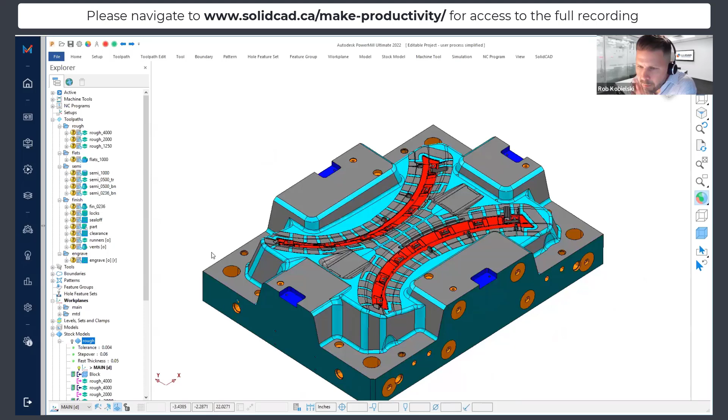And that's what I'm going to highlight right over here. I'm just going to jump into this one straight away. I've loaded up another project here. You can see, this is a block that I had up earlier, but we can consider this as an exemplar project. And what I mean by that is, let's just say I want to encapsulate these programming processes in every type of job that I bring in. I want to create a process for these toolpaths right over here.

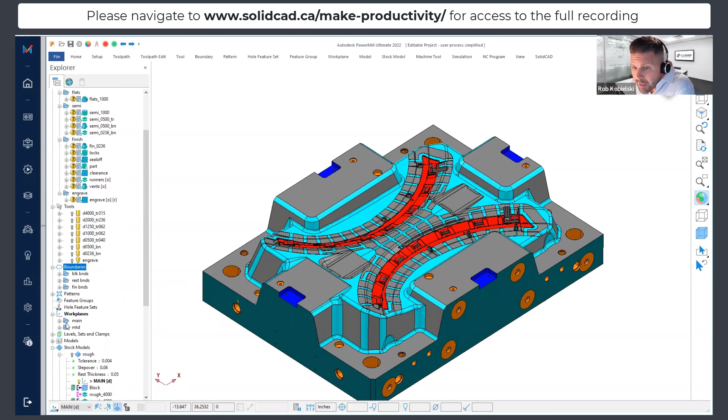What the user can do is manually make your entire project, use your naming convention, use your tools, use the kind of boundaries that you want, and most importantly, your stock management. And once you have this all set, we're going to create a process with a single mouse click to automate this again and again. Okay, so the only thing you have to do is think, well, what's the item I'm not going to be bringing in every time? And that's clearly going to be this model.

So I'm going to ditch this model right over here, and I'm going to leave every other entity in this project. And I'm going to use this tool right over here in Make Productivity called Automated Process Macro Builder. It's going to give you the option straight off the hop to say, what do you want to automate? What do you want to bring in every single time? And what I said is every project entity. That's going to include your folder organization, all those items I mentioned.

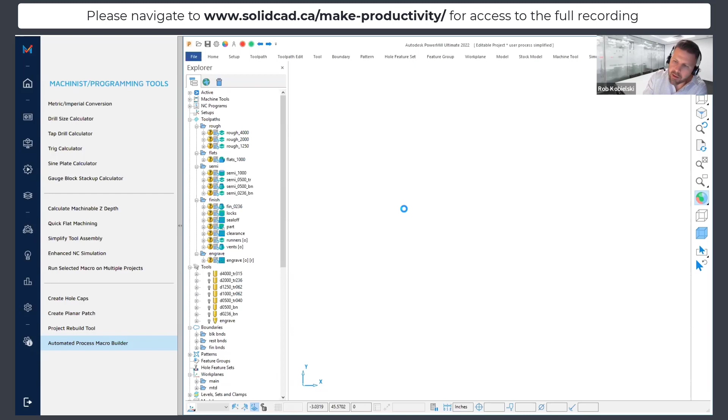So this is actually happening live right now. Single mouse click, Make Productivity is copying everything. Your favorite parameters, your step overs, your strategies, everything like this. And when it finishes up, I'll just very quickly load the code that it has made, just so we can see there's nothing up my sleeve, right?

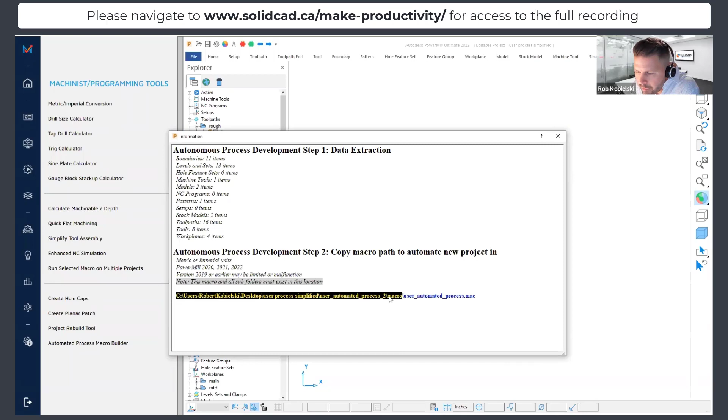So this ought to be wrapping up quite shortly. Here it is right over here. Actually, this is your final confirmation. And it's telling you, okay, all you got to do now is you have an automated process. Run this automated process against your new project. And if I crack open Notepad just real quick,

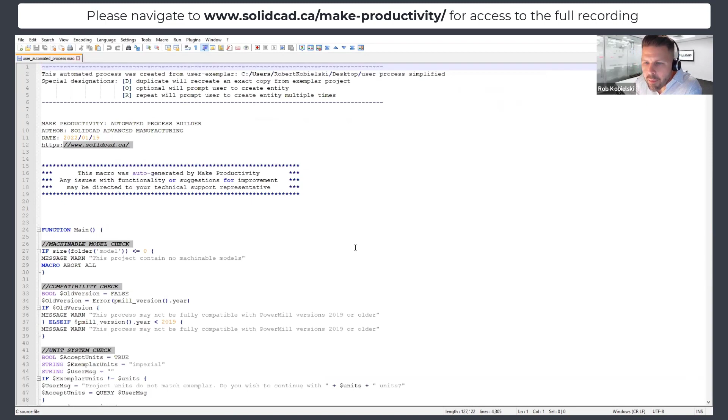here it is, right? 5:26 p.m. This is probably a 4,000 plus line macro, but it is made to completely replicate your project on new models. So I am going to do that right now.

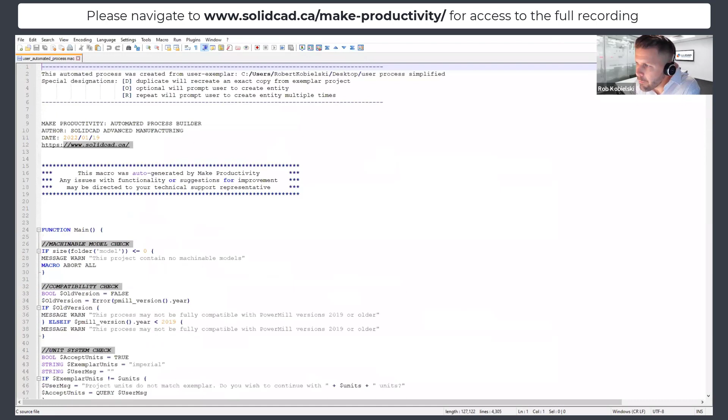And in fact, I'm going to do it in an older version of PowerMill 2019 in a different unit system, right? My source unit system was inch. I'm going to run this thing in metric just to show you that it is going to be completely adaptable for you. Here it is right over here, 5:26 p.m. No machinable models. All right, well, that makes sense, right?

So the only thing I've got to do is say, what do I want to cut? Let's say I want to cut this block right over here, and that's the only thing I've done is brought in the block. Let's run this guy. Process may not be fully compatible. What it's saying is my source was 2022, and I'm now running it in 2019 with different unit system. Not a problem. How do you want to handle your block?

Toolpath with a feature that wasn't available back then, I think is the warning, right? Exactly. It's just a disclaimer to say that, back in 2019, they didn't have things like orientation vectors. Items like this that advanced users of 2022 will certainly understand.

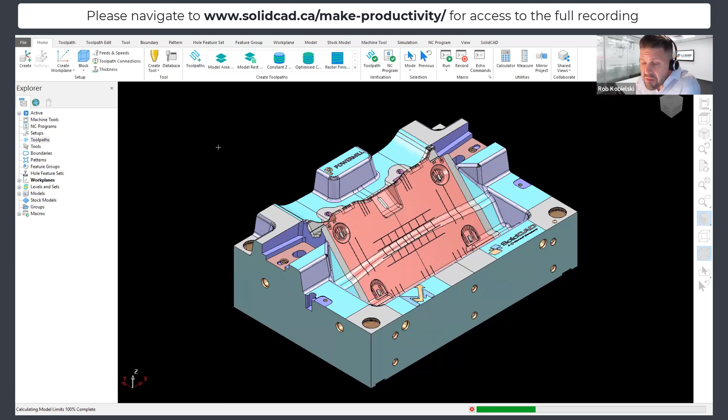Okay. So the first step is just the first couple mouse clicks to say, how do you want to make your stock, right? How do you want to make your raw block size? So you can select the different axes to expand on, key in whatever value you want, make it based on your global transform, specified work plane, or you could even have the option to pause, allow the user to make it manually, and then continue the process.

So here we go. Every item is being created right now. I'll just expand these little headers so we can see what's happening. The stock models have been made temporarily as placeholders. And now every single toolpath entity is being built in this new session. The boundaries are being set. Reference tools are being set. Step over, you name it.

Everything is not only being set, but it's being swapped as far as units are concerned, right? So, if I happen to have a 1/4 inch step over, then it would do a little conversion, bring that into metric.

So Rob, would it be fair to say that's a great way to share machining process amongst different staff as well? Oh, absolutely correct. Because once you generate it, maybe I generated this one because this is how I want to handle this type of block. And I would name it as such, and share with whichever operator is going to be working on such a job. And then if you want a cavity process, you can make your own. That's the beauty of it. You're working with your own project data, and we don't have to make a customizable one every single time for you. You can handle your own.

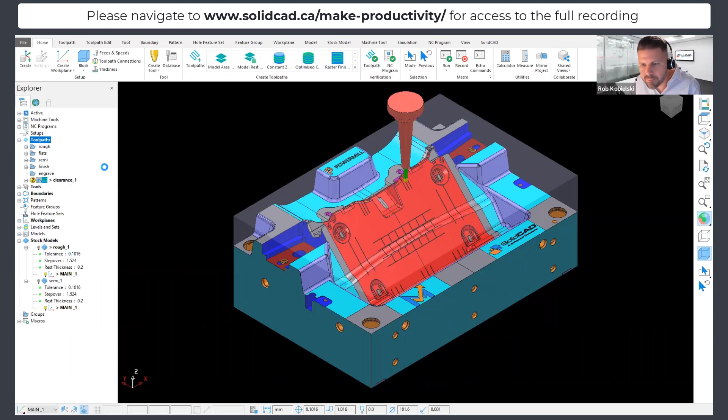Okay. Now, here's a perfect question, and this is brought up every time. Well, what if I don't exactly have the same features every single time? It's super simple. All you got to do is have an instruction in the name of the toolpath. So you might see there's an O in square brackets. That's an optional toolpath. If I don't have runners on this job, I say no. If I don't have vents on this job, I say no. If I happen to have engraving, I can say, okay, yep, give me an engraving toolpath.

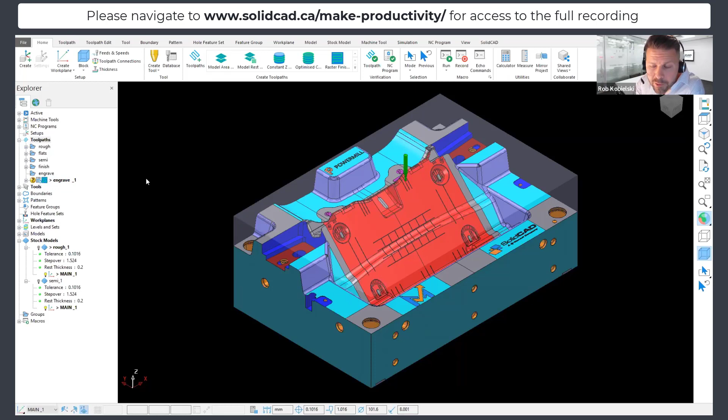Boom, here goes the first. And what if I have 2 engravings? There's an option to repeat. Yeah, give me a second engraving toolpath. I want that. Right? And you just go on with the rest of the prompts. So once you get comfortable with developing your own process here, it's just a matter of your own naming convention. And the better it is, the easier it is going to be to run your automation after the fact.

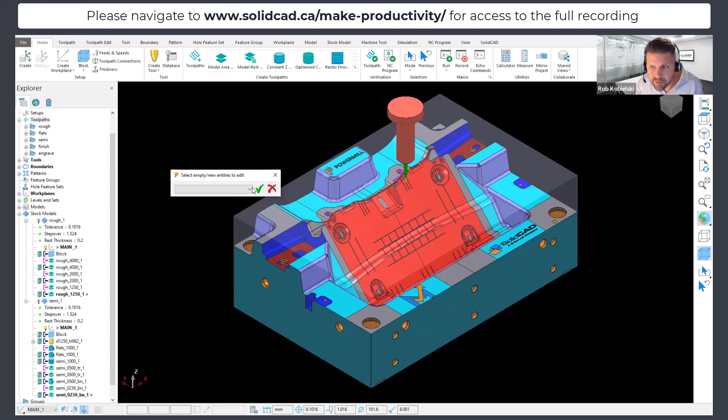Right? It's wrapping up right over here. In fact, you may have just seen the stock model has been completely populated now with all the states and references at the very end, right? So your final prompt: hey, do you want to take a few minutes and revise your boundaries? Do you want to look at any of these new entities you created? You could say yes, or simply say no, and your automated process is complete.